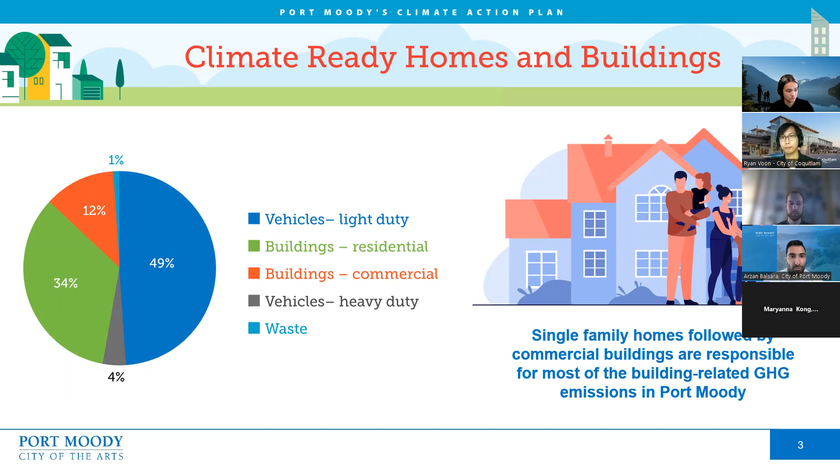So I'll just request that we go to the next slide, please. Port Moody has developed the Climate Ready Homes and Buildings Plan, which was adopted by Council last fall. The plan outlines specific actions that the city, residents, and business owners can take to make homes and buildings in Port Moody climate ready.

So what exactly is climate ready? A climate ready home or building is one that has been designed or modified to meet low carbon and high energy efficiency standards and manage many of the risks related to climate change, such as heat-related illness, poor indoor air quality, or damage from flooding or windstorms.

Go to the next slide, please.

You might have already researched heat pumps in the past and thought, these things are expensive. Well, we've got some good news. Port Moody is proud to say that we will be offering top-ups on the already existing rebates provided by the province and the federal government. We're offering $350 for a heat pump and $350 for a heat pump water heater, as well as $500 for any electrical service upgrades that might be necessary as a result of these retrofits.

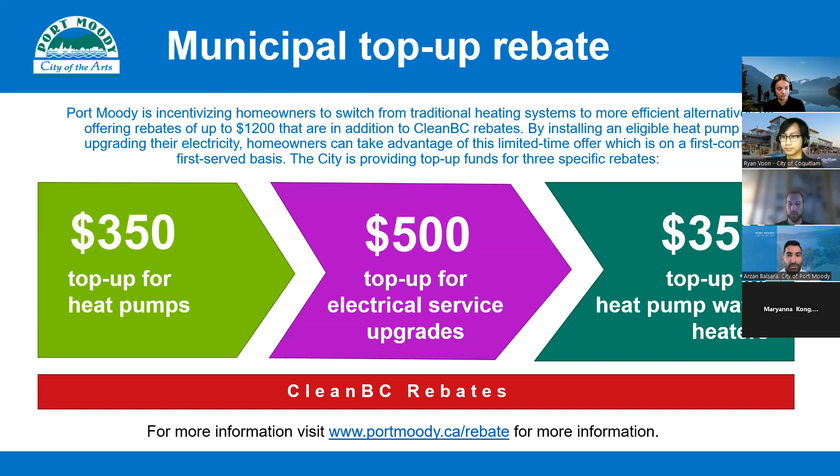These are all on a first come, first served basis. As Ryan can probably attest to, these rebates are pretty popular and tend to get picked up pretty quick. So if you would like more information on these rebates or any other rebates that Port Moody is offering, please visit portmoody.ca/rebate. And with that, I will pass it over to Ryan.

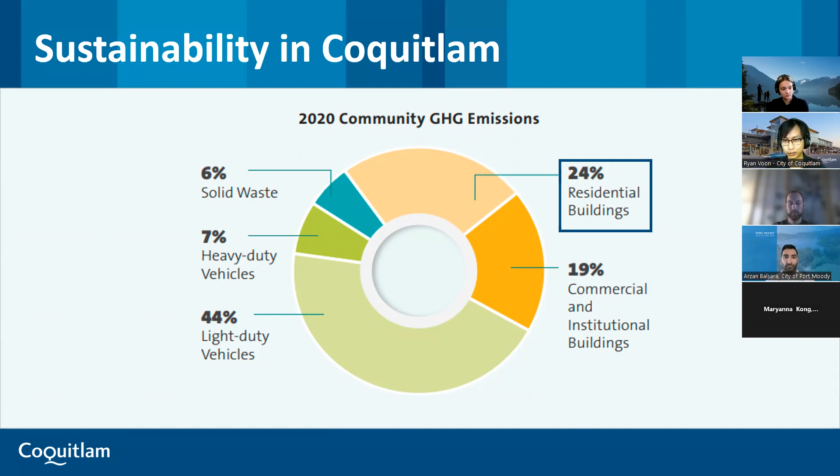Finally, also happy to announce, like Port Moody, residents in Coquitlam have the opportunity to access municipal top-up rebates from the city. If you are living within the municipal boundaries of Coquitlam, you are also eligible for a $350 heat pump top-up, $350 heat pump water heater top-up, and a $500 electric service upgrade top-up, which is in addition to the CleanBC rebates that you'll learn more about today. If you want further details on these rebates, visit coquitlam.ca/energyupgrades for more information.

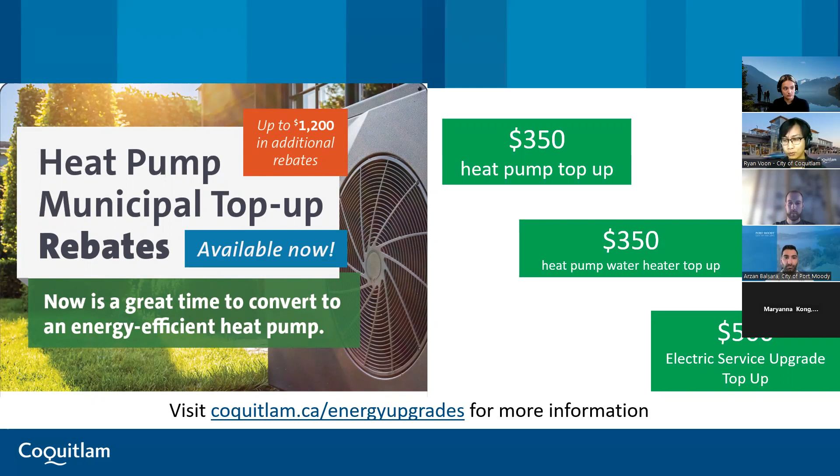Hey everybody, as mentioned, my name is Scott Walmsley and I'm the environmental coordinator for the city of Port Coquitlam. My role with the city includes the implementation of the environmental strategic plan, as well as the development of the city's urban forest management plan. I'm currently working on the development of the city's updated climate action plan, which is nearing its final stages. This new climate plan is intended to be a science-based plan focused on a low carbon resilience approach to climate action.

We're looking to integrate both emissions reduction initiatives as well as ways we can adapt to climate change. The plan is designed to assess and respond to climate-related hazards and impacts on 5 major sectors: critical infrastructure, natural systems, health, well-being and culture, housing, and economic development.

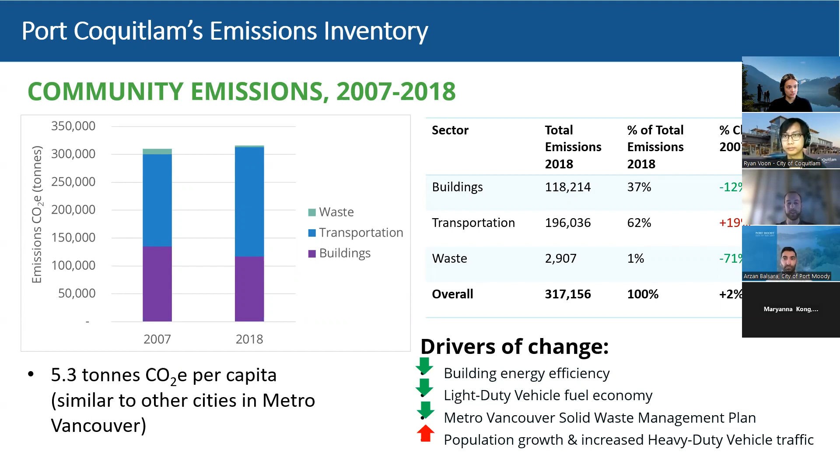In Port Coquitlam, our buildings take up roughly a third of our overall emissions. What's really interesting is the change from 2007 to 2018, showing we were somewhat successful in achieving an emissions reduction at the building scale since we last did this work in 2007. Improving building energy efficiency, predominantly through the BC step code, impacted this reduction. However, overall emissions increased a small amount during that time frame. That sends the message that even though we're able to achieve some modest reductions, there's still a ways to go to meet those science-based targets, which is why we're here today.

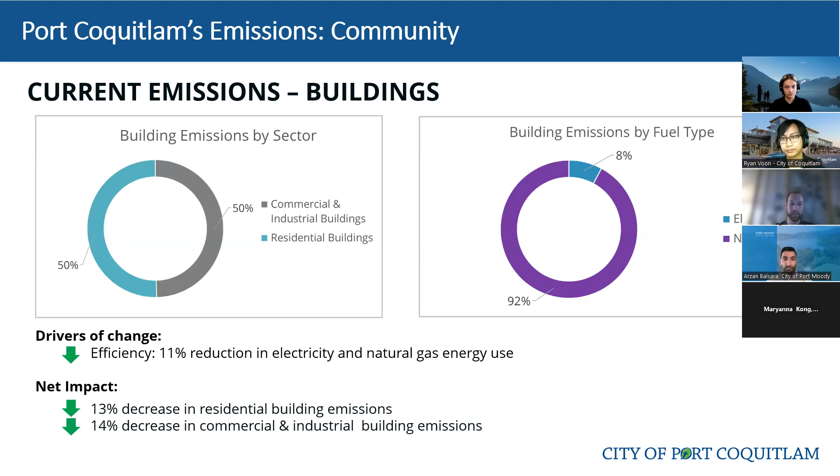Finally, what we're trying to achieve is to access part of the market that can focus on low carbon heating and cooling sources. You can see that 92% of buildings currently are heated by natural gas, and only 8% are heated by electric sources. Switching to electric heating in our residential buildings is a massive leverage point we could access to reduce emissions in our homes and buildings overall, and continue that trajectory of energy efficiency and emissions reductions.

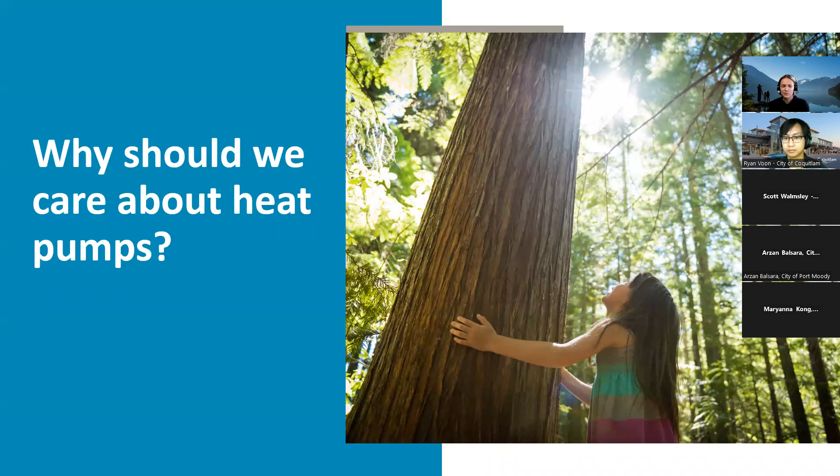So why do we care so much about heat pumps? Why are we seeing them everywhere, with so many ads on TV and radio? One of the biggest reasons is climate change, which we can see day to day, from the heat dome a few summers ago to the wildfire events throughout Canada in the last couple of months. As these extreme events become more common, it's more important to look at how our buildings and homes are contributing to climate change, as well as how we can adapt and become more resilient to its impacts going forward. Energy efficient upgrades are one of the best ways to achieve a more resilient and comfortable home as our climate changes.

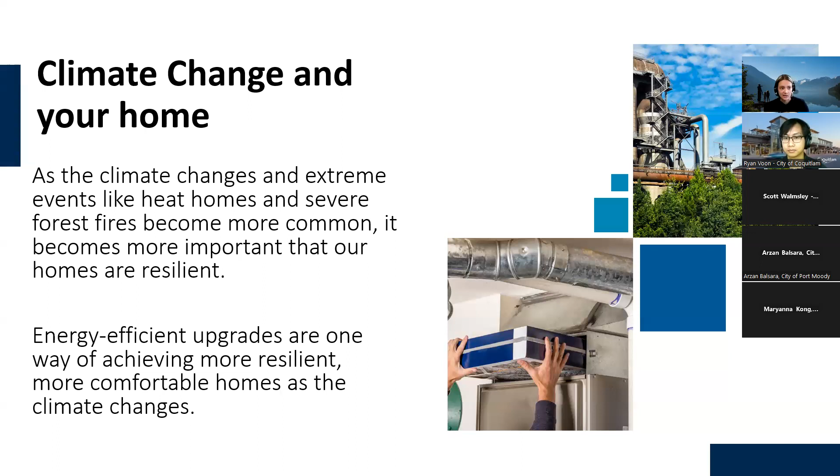Switching to heat pumps makes sense because here in BC, we're fortunate to have some of the cleanest electricity - about 98% of it is actually hydropower, which is considered carbon neutral. Heat pumps run off electricity, so that's also why they can be so climate friendly. Yet we're still experiencing roughly 70% of our economy being powered by fossil fuels. So how do we start thinking about shifting away from fossil fuels towards clean energy such as electricity?

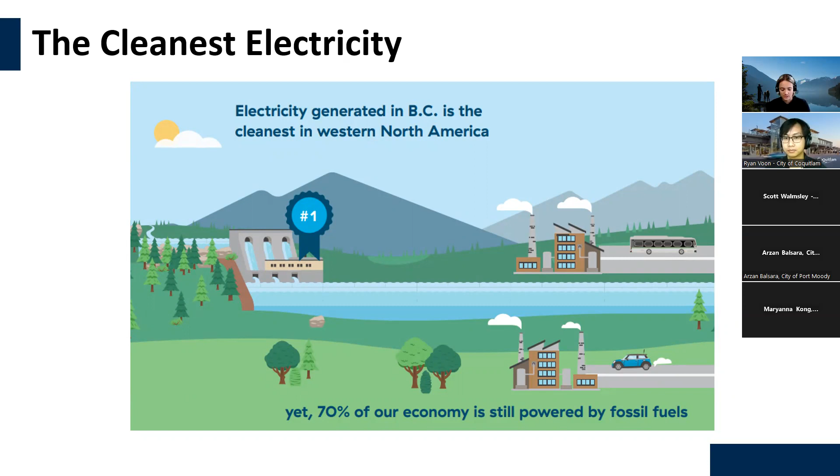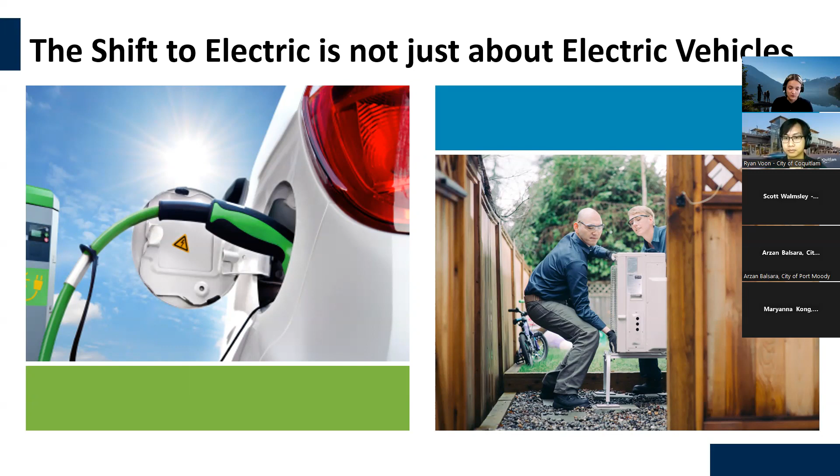A lot of us think about this too - electric vehicles have become so popular in recent years, and we seem to get very stressed or concerned about idling a gas-fueled vehicle for even a few minutes outside. Meanwhile, if you're using natural gas or propane to heat your home, you are essentially idling your home 24/7. So shifting to cleaner means of heat, like a heat pump, can have almost as great an impact as switching from fossil fuel cars to electric cars.

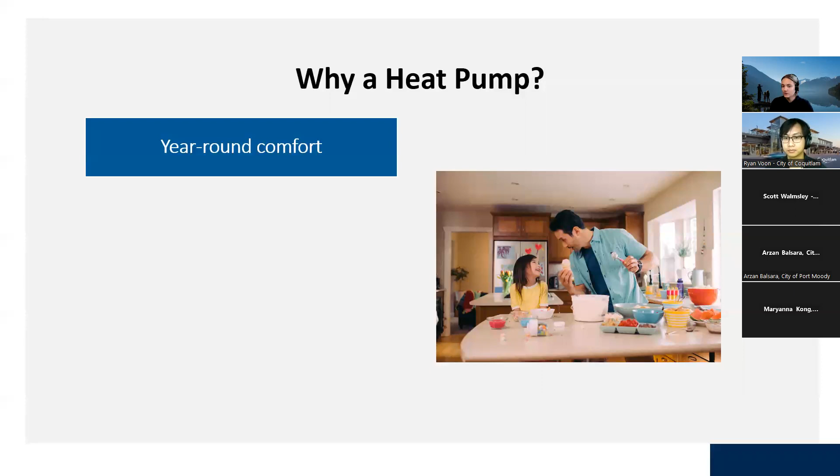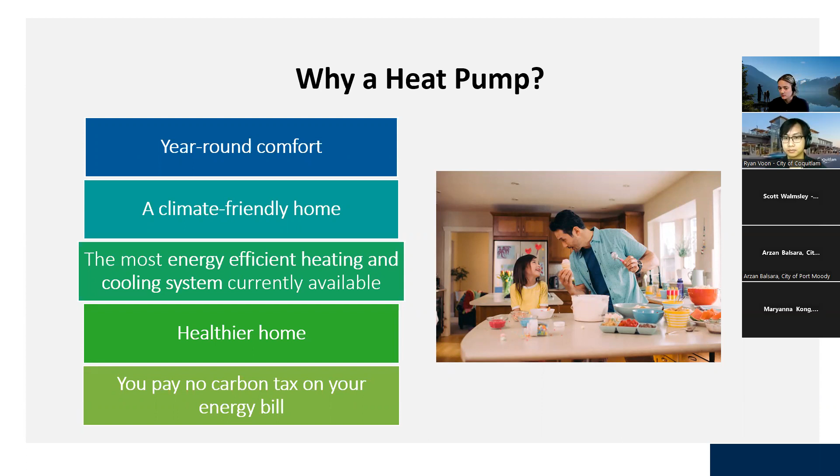There are a bunch of benefits when it comes to heat pumps, and that's why they are such a topic of conversation. Going through some of the benefits, we have year-round comfort. Heat pumps provide not only heating in the winter, but cooling in the summer as well, so they're two systems in one. You'll also get a climate-friendly home, shifting off of fossil fuels towards electricity. They're also the most energy efficient heating and cooling system available. You can also have a healthier home with the air filtration heat pumps offer. And if you're making that switch from fossil fuel heating, you'll no longer be paying a carbon tax on your energy bill. Now let's dive into these in a little bit more detail.

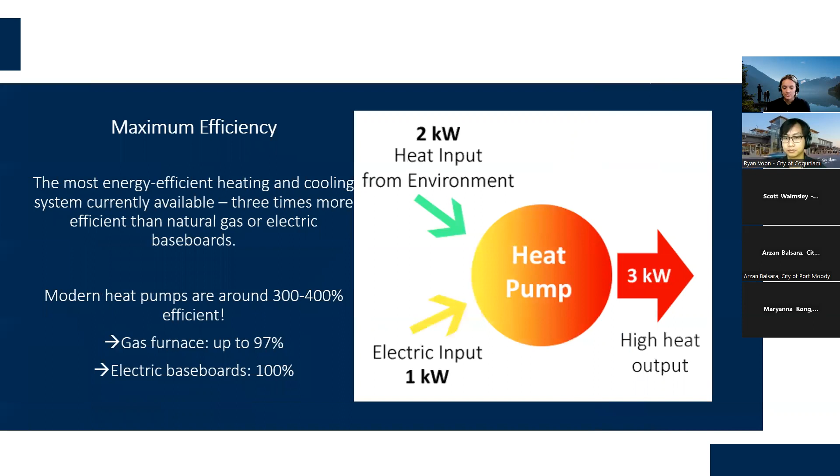Starting with maximum efficiency. Heat pumps are the most energy efficient heating system available, typically about 3 times more efficient than something like a natural gas furnace or electric baseboards. You might hear, wow, 300%, how is that even possible? For comparison, electric baseboards are about 100% efficient, and your gas furnace generally up to about 97% efficient. The key reason heat pumps are able to be so energy efficient, 300% or more, is because they're not creating or generating heat.

They're moving heat that already exists, pumping it up to a higher temperature and releasing it inside your home. If you look at the graphic here, we have heat that already exists in the outdoor ambient temperature, just hanging out outside, and we add a little bit of electrical input to run the components of the system that allow it to pump that heat up to a higher temperature and release it inside your home. That's how you're able to get those really high efficiencies when heating with a heat pump, because you're moving heat, not generating heat.

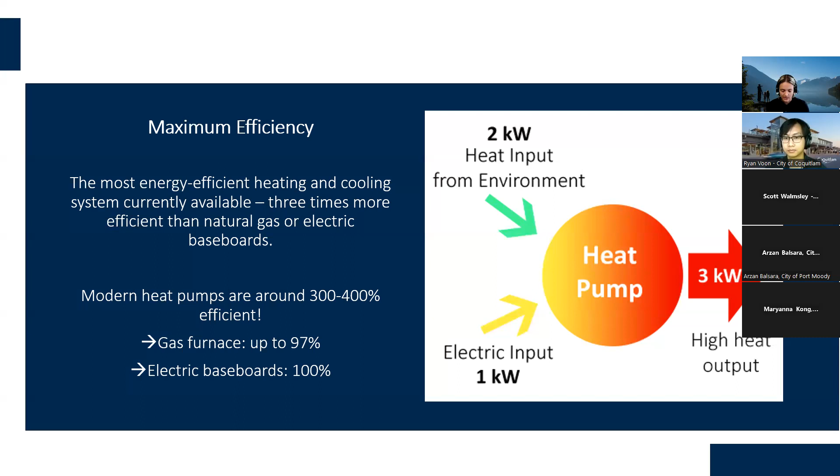We also have cost-effective. Heat pumps are the most cost-effective electric heating option. If you're making the switch from electric heat, baseboards, or a furnace, you might see reductions of up to 50% on your energy bills. Again, that 100% to 300% efficiency change is quite a jump, so you'll see that reflect on your bills rather quickly. If you're making the switch from gas, homeowners often experience similar or lower bills when making that switch.

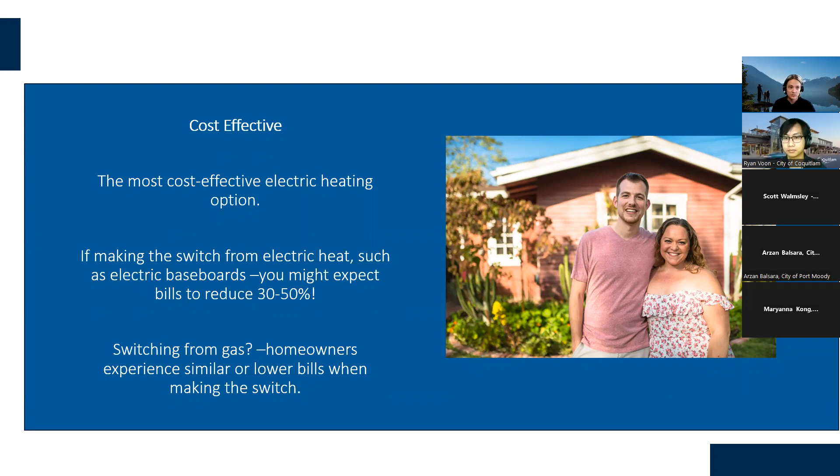You also have a climate-friendly home, as they are the most climate-friendly heating and cooling system here in BC. As I mentioned, BC electricity is about 98% hydropower, and hydropower is renewable. Taking a look at the image here, it's no surprise that oil heating has some fairly substantial greenhouse gas emissions associated to it. But even looking at something like natural gas, there's still a large chunk of GHGs associated with burning that as a fuel source in your home. If you choose an electric heat pump, that's going to dramatically decrease your household emissions.

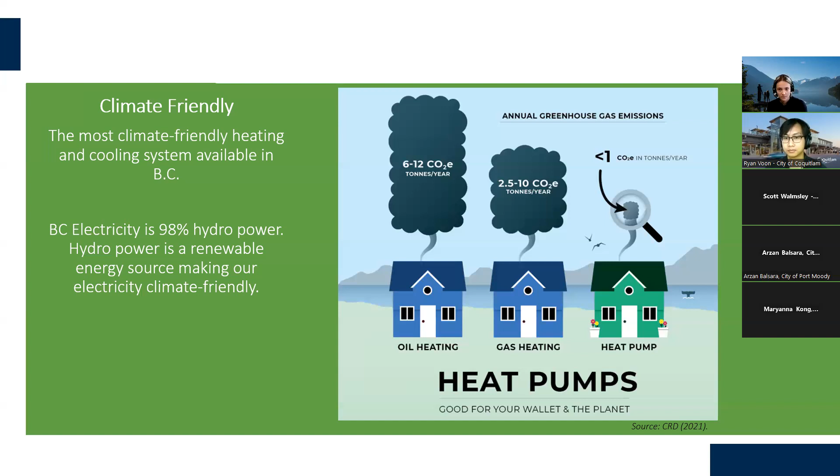You can also have the opportunity for better indoor air quality. Heat pumps do actually provide some air filtration as well as humidity control that can help rid your home of indoor pollutants, dust, pollen, and other allergens. Between some of the different types of systems I'll share in a couple of slides, we have options for some more basic filtration as well as higher end, high quality add-ons for filtration, depending on what you might be looking for.

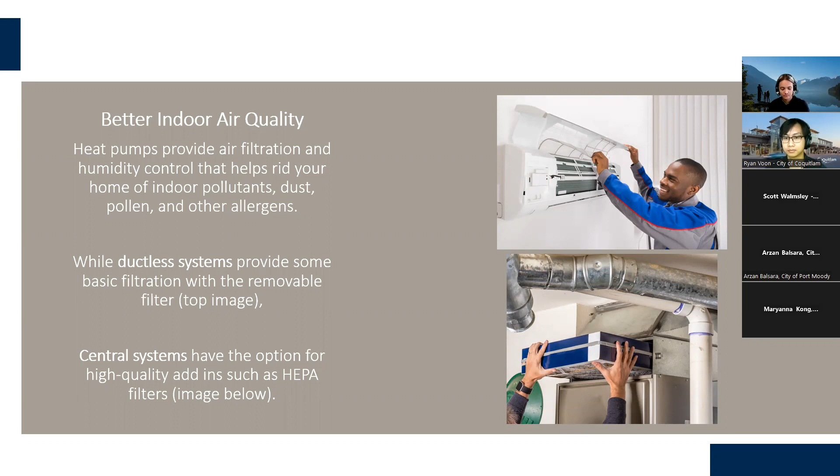And again, we have cooling and dehumidification, two systems in one. When you install a heat pump, you get that added benefit of cooling in your home, so you can be better prepared for other extreme events, such as a heat dome, making sure that you and your loved ones, including your pets, can all stay comfortable inside the home. They also have that dehumidification option as well, if you're looking to reduce some indoor moisture in the home.

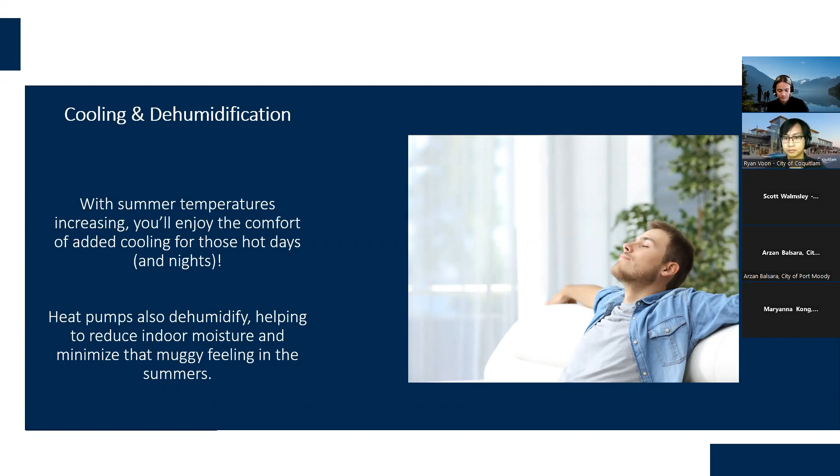Heat pumps also practice a really great set it and forget it approach. Unlike a gas furnace, where you might adjust the temperature settings multiple times throughout the day, a heat pump is best left alone, setting it to your desired temperature and letting it do its thing. It will operate most efficiently when you practice set it and forget it, and it makes it really easy when you don't have to worry about adjusting the temperature throughout the day.

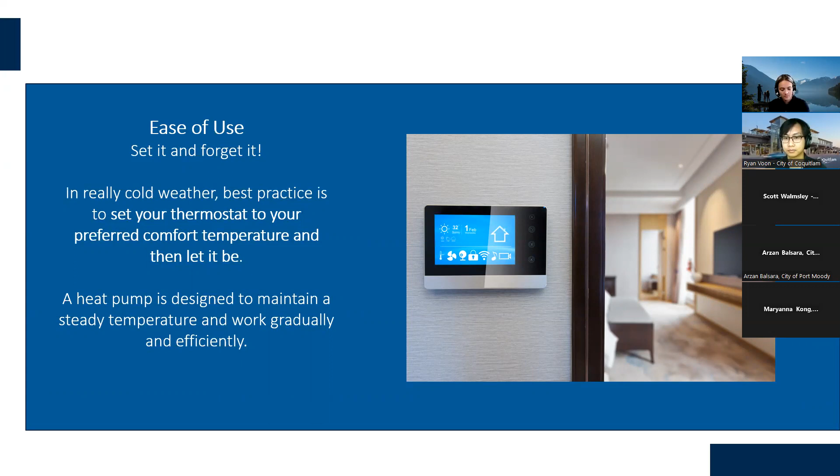There's also the option for zonal heating, especially if you're looking at something called a ductless mini split heat pump. You can really customize the system to suit your home. Zonal heating allows you to have different temperatures. If you perhaps have an in-law suite and they like it a bit warmer or cooler than you might, you do have that flexibility for different temperature zones with a heat pump.

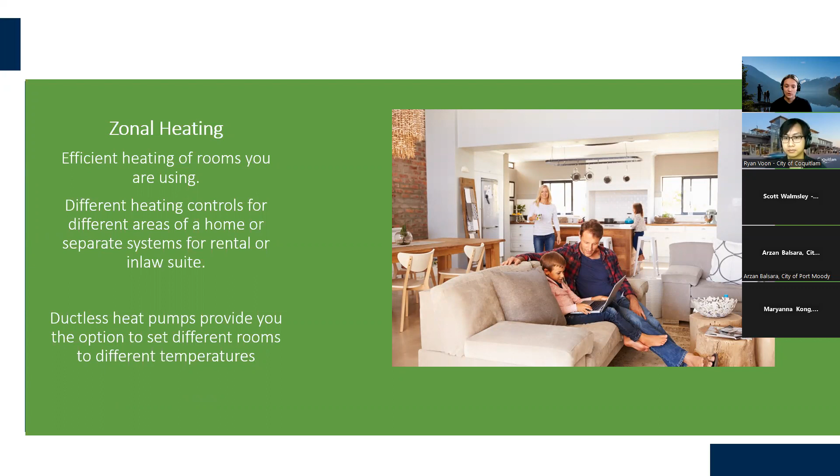Now, to really wrap up all of these great benefits, heat pumps are the heating system for the future. Just like electric vehicles, we've seen this shift. More and more cars are shifting to be exclusively electric off of fossil fuel. We're seeing that same shift in home heating, moving off of fossil fuel towards electric heat pumps. They really are quite simply the Tesla of heating systems, if you will, making your home ready for the future.

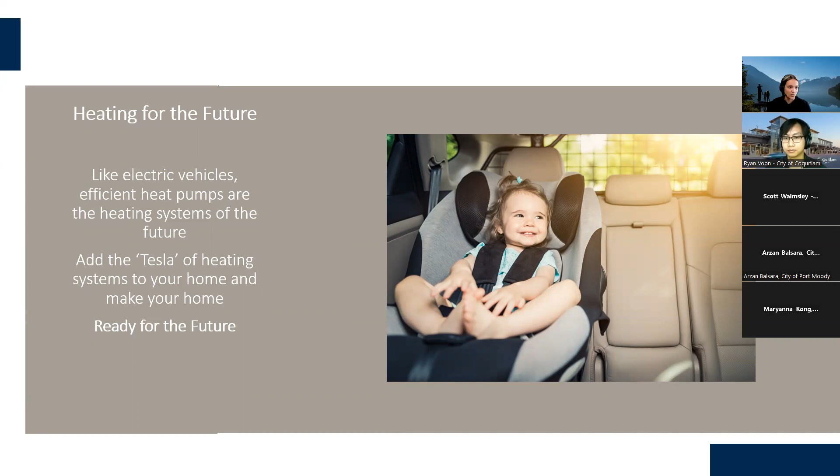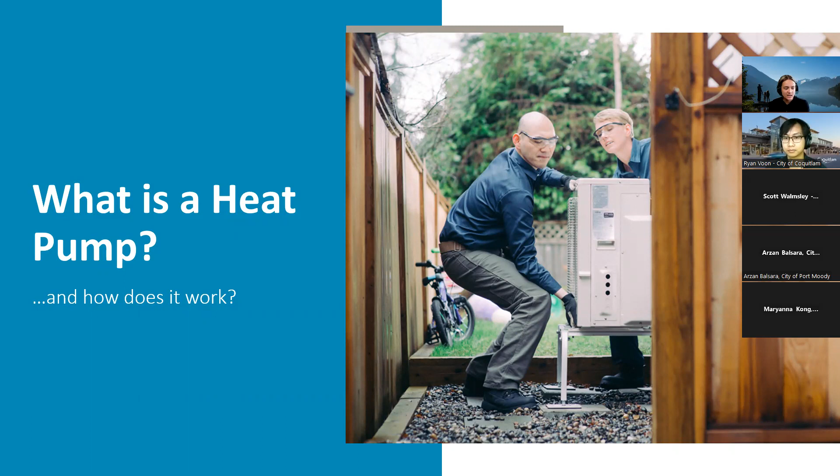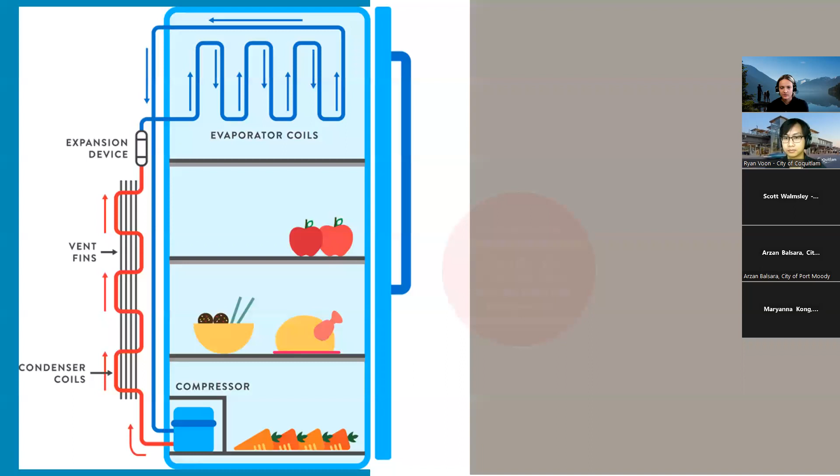Now, I've spoken on this a little bit, but to dive into heat pumps in more detail and how they work, you may be surprised that you already have a type of heat pump in your home, because your refrigerator is essentially a heat pump. Refrigerators work where the coils in the back of the fridge help remove the warm air inside and release it out the back. That cycle continues, ensuring the drinks and food inside your fridge stay nice and cold. A heat pump is really no different. We often avoid looking behind or underneath our fridge, depending on how old it is, but if you take a look, you'll see those coils, and they're often pushing out heat if you put your hand close to it. So that's the heat pump in your refrigerator working to remove the heat from inside.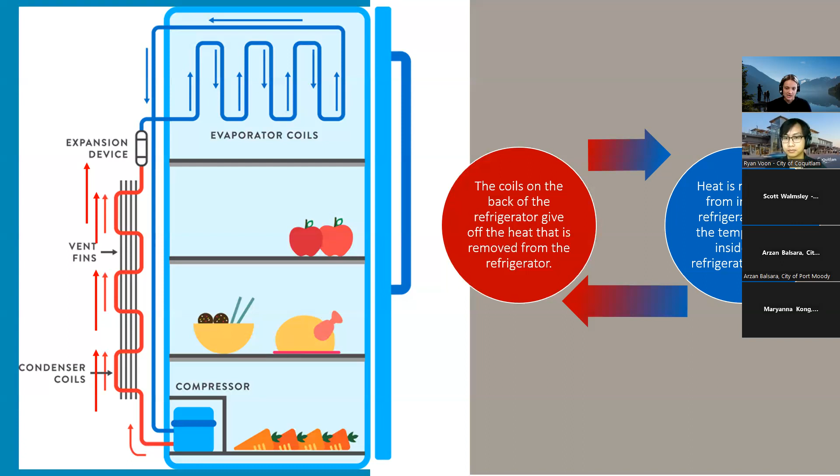Now, to hear a little bit more about how heat pumps work, I'm going to pass things over to Dave at BC Hydro.

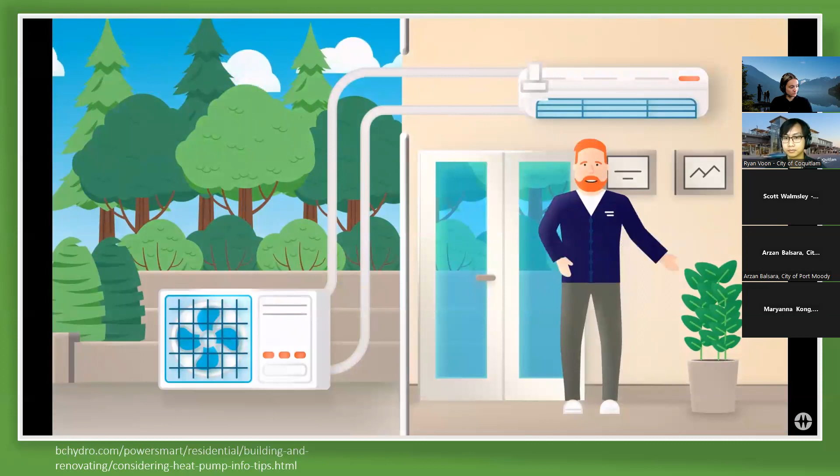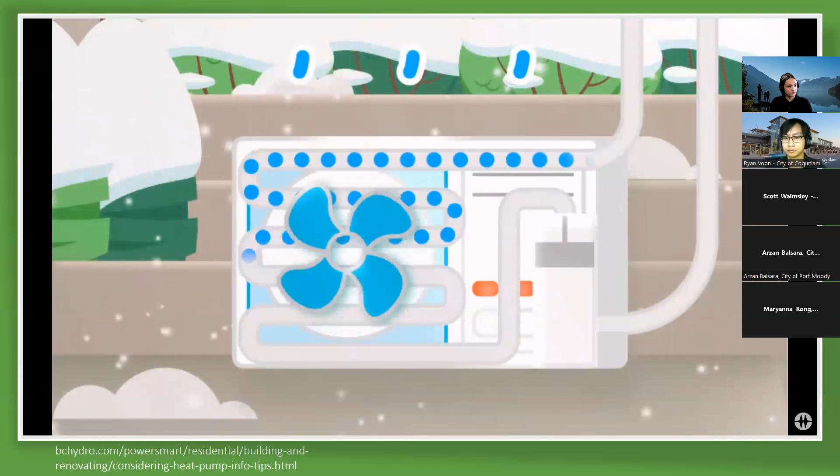Hey, it's me, Dave, and this is a heat pump. It's an energy-efficient heating and cooling system you can install at home. How does it work? Here, let me show you. Your typical air source heat pump, like this mini split system, has two main components, an indoor and an outdoor unit, connected by a refrigerant line. To heat your home in the winter, the outdoor unit pulls heat from the air outside your home. Yes, believe it or not, even when it's cold, outside air still contains a certain amount of heat. The warm air then goes through a refrigerant coolant that is compressed to increase the temperature even more. This warm air is then pushed through to the home.

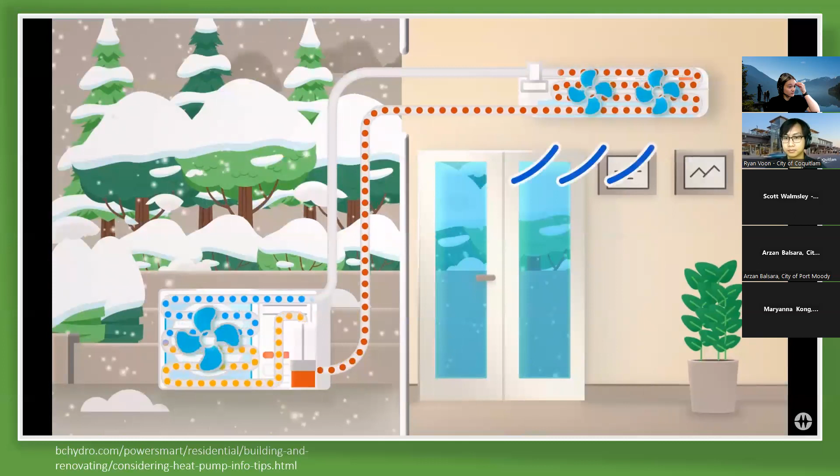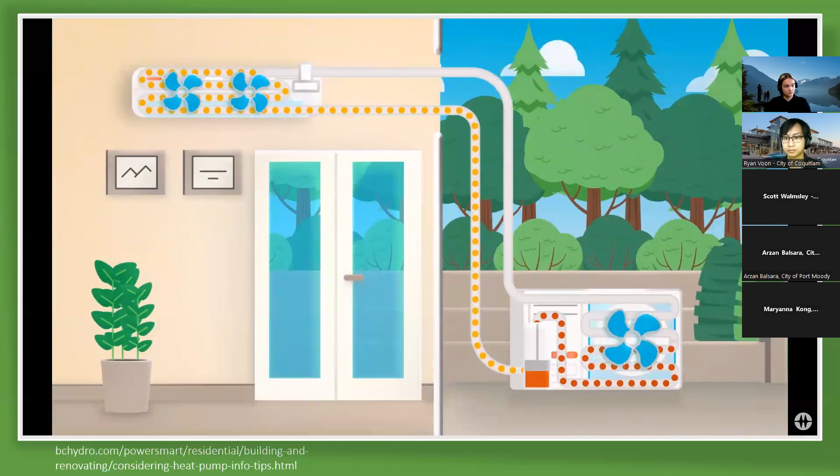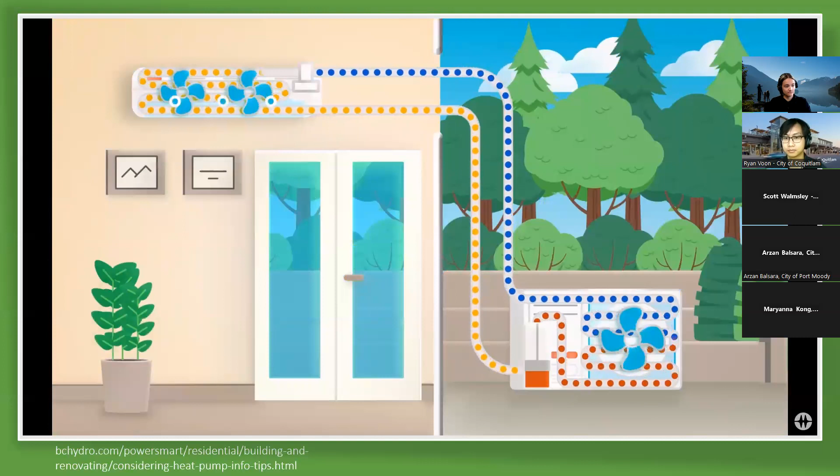In the summer, to cool your home, the process is reversed. The heat pump absorbs the warm air in your home and transfers it outside. The compressor circulates refrigerant to the indoor evaporator coil, and the refrigerant absorbs heat as it passes over the indoor air. The resulting cool and dehumidified air then gets blown back into the home. And that's how a heat pump works.

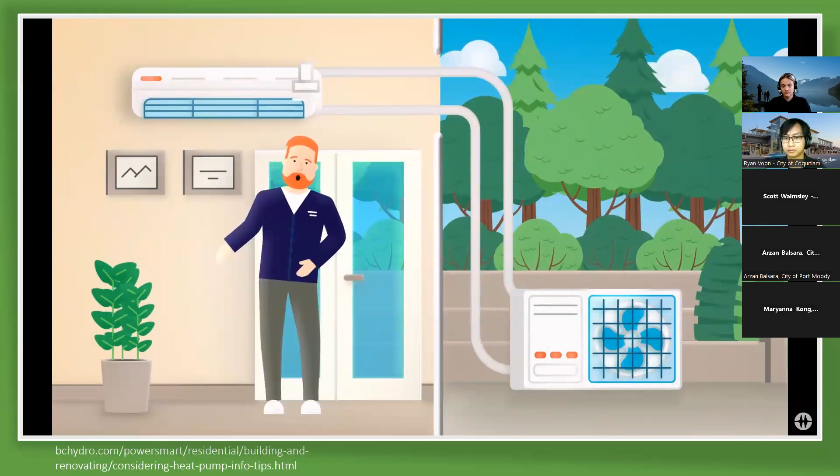The key here is that heat pumps don't generate heat, but instead move it from one place to another, which is why heat pumps are so energy efficient. In fact, a heat pump can be up to 300% more efficient than electric baseboards. So if you already have electric heat, a heat pump can help you save on your energy bill. Less energy and more savings? I like it. If you're switching from a fossil fuel-based heating source like a natural gas furnace, you'll be reducing your carbon footprint. It's kind of like going from a size 18 down to a size 2. You get the idea. It's an environmentally friendly option, especially here in BC where we're powered by water. Plus, with rebates from CleanBC and BC Hydro, there's more to save.

Thank you, Dave. Alright, well, we've already seen one type of heat pump from that video, but starting with another type, we have the central ducted system. These systems utilize ductwork connected to vents in your home to provide whole home heating and cooling. They're often a great option to replace a gas or propane furnace when you have that existing ductwork in your home.

They will often be connected to a slightly larger outdoor unit, connected with refrigerant lines to an indoor air handler. That would be the sort of box, if you will, that replaces the furnace, often found in your mechanical room, and it would distribute that warm and cool air throughout your home all season long. They're connected through a wall thermostat, just like a furnace, to be able to make those temperature adjustments.

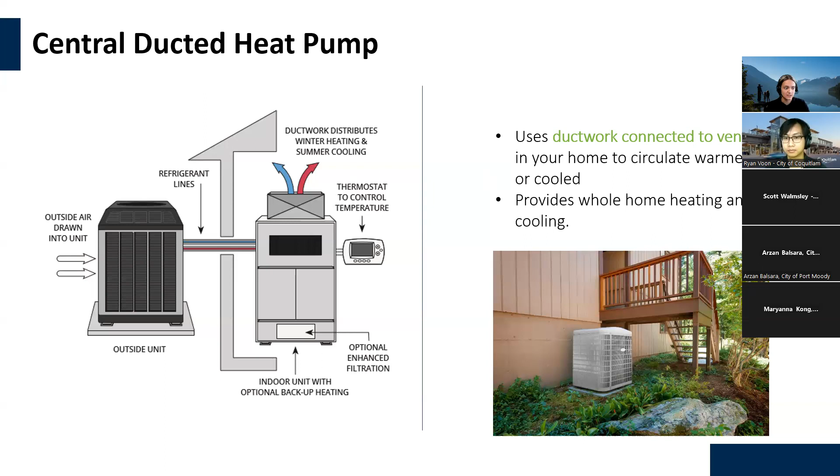Now, the other type of system that we see quite often is a ductless mini split heat pump. These systems provide zonal heating and cooling through the use of indoor heads or units. You don't require any ductwork at all for this type of system. They're generally about 3/4 of the way up on a wall, providing that zonal heating. They can be a great option if you have electric baseboards or an old boiler and don't have ducts for a central system.

That doesn't mean you don't get to install a heat pump. These are a great option. They can be connected to one or multiple indoor heads. Based on the graphic on screen, we have a smaller outdoor unit connected to refrigerant lines that go to the indoor head. If you have a few different heads, there might be a different line to each indoor unit, and each unit would be controlled through a remote.

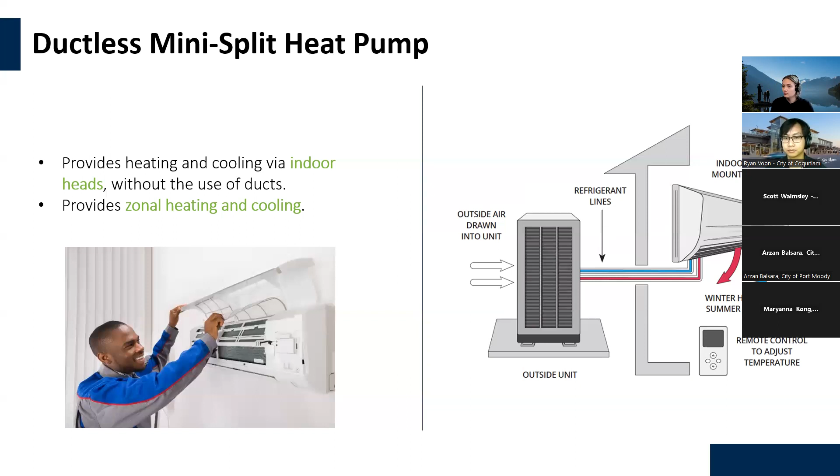Now, to compare the two quickly: both the central and ductless options will provide air conditioning, where the ductless option is the one that will truly give you that zonal heating option. Central systems are the only ones that require ductwork, and they will both provide air filtration and dehumidification.

So for ideal installation scenarios for a central system, realistically we have existing ductwork in the home. We're looking for central heating and perhaps more effective air filtration, with options for high quality add-ons with a central option.

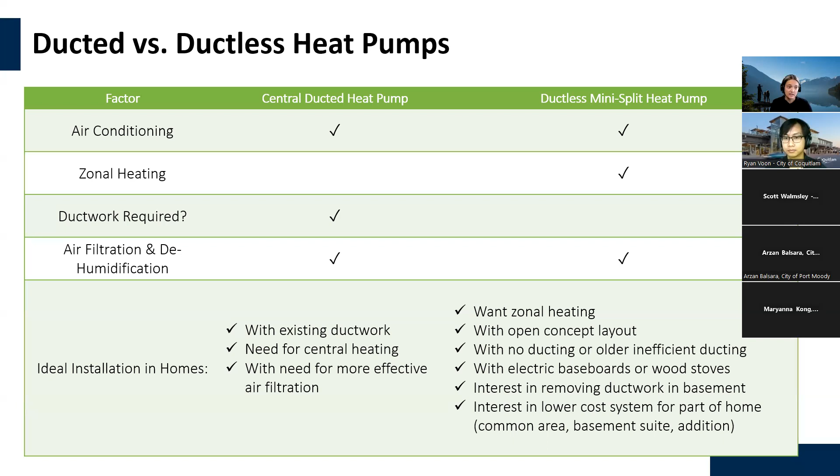In the case for ductless, we are looking for zonal heating, perhaps an open concept layout or a home with no ducting, replacing electric baseboards or even a wood stove. Maybe you're interested in removing ductwork, making your basement suite a more livable space, adding some ceiling height. That can be a great way to get rid of that ductwork and install a more high efficiency heating and cooling system in your home.

On to some of the different heat pump myths that we often hear about. The first one is that heat pumps are expensive to purchase. Before I dive into this table in more detail, I want to share some context.

This is pulled from a fuel switching case study from 2022, and it really does emphasize that there is a significant range in installation costs when it comes to both a high efficiency gas furnace and a central ducted heat pump. We have the average range you'll see, keeping in mind that cost is always going to range based on a number of factors, from brand to contractor to your home size and layout. Just something to keep in mind.

Looking at the screen, generally speaking the average cost of a high efficiency furnace is somewhere around $7,000. For a central ducted heat pump, you're looking at something around $18,000. Now you might be thinking, okay, that's a fairly large difference in cost. But now we look at available incentives: FortisBC does have a rebate of up to $1,000 if you're installing a new gas furnace. If you're installing a heat pump, there are rebates and other incentives of up to $11,000, bringing the cost after rebates to be quite comparable between the two.

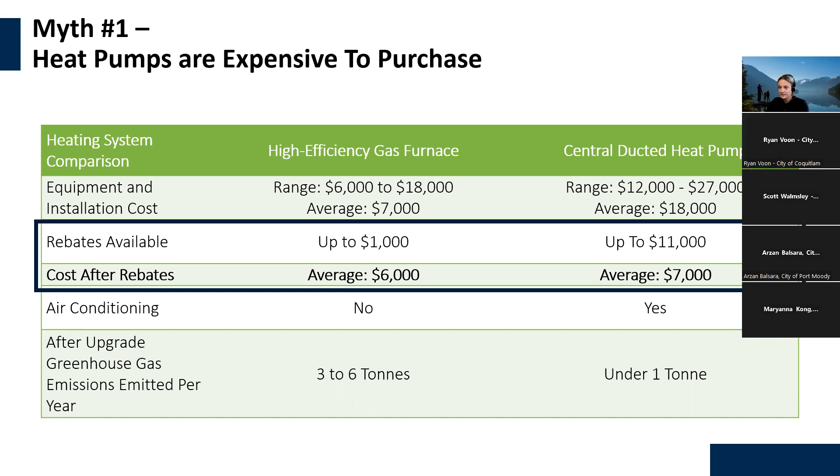Oh. Find my slide here. Everyone can hear me okay still? That was just a little tech hiccup. All good? Thanks, Ryan. Sorry about that.

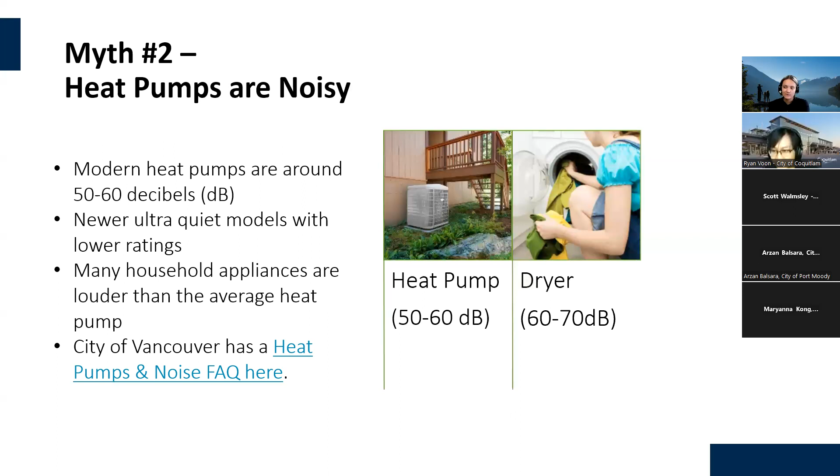Alright, so as I was saying, a myth we hear is that heat pumps are noisy. While older systems definitely could make some noise, the technology has come a long way. Modern heat pumps are typically around 50 to 60 decibels, with new ultra quiet models being even quieter. You'd be surprised that many average household appliances are louder than a typical heat pump. Here we have a dryer that's actually a fair amount louder at 60 to 70 decibels, and even the sound of a toilet flushing is quite a bit louder than that.

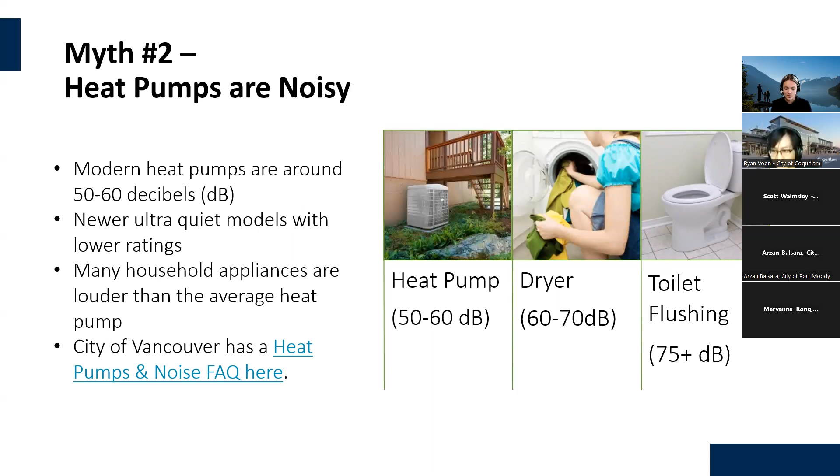Keeping in mind, when we talk about the noise associated with a heat pump, most of that concern comes from the outdoor unit. So really, noise should not be a concern, as they are much quieter than in years past. For more information on noise, as well as key considerations for siting or placing that outdoor unit, the City of Vancouver has a really great FAQ, linked in the slide you'll receive a copy of following this webinar. It goes over some great tips and tricks on using landscaping and other things to help deter some of that noise that may come from the outdoor unit.

Moving on to myth number 3: that heat pumps need a lot of maintenance. Well, really, just like any other heating system, they do require typical regular maintenance. So similar to a furnace, best practice is to schedule a servicing appointment every 1 to 2 years to make sure the system is running smoothly. You can also do some general maintenance yourself, such as cleaning the filters and making sure the outdoor unit is clear of any debris. This will help ensure the system can work better for you in the long run as well.

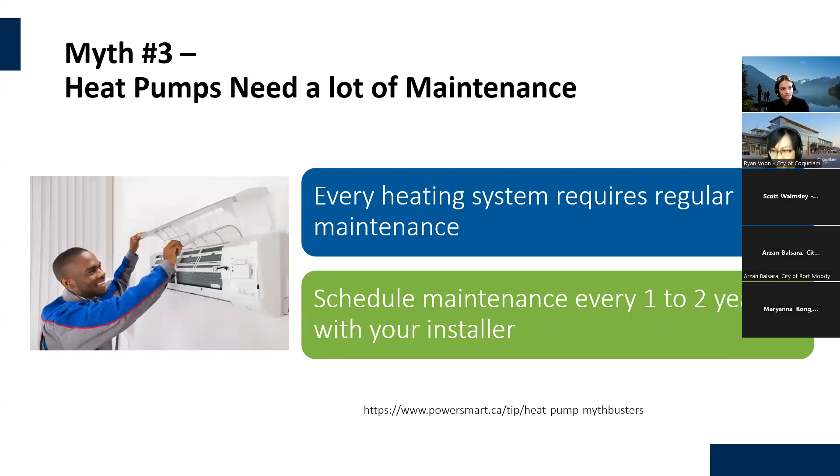Myth number 4 is that heat pumps are expensive to operate. Now, this one does come with a fair amount of text on the screen here. To really break that down, homes with heat pumps can have comparable to lower operating costs to that of a natural gas home. And there are some key considerations around that.

The first one is you will, of course, see changes to your hydro bill. If you're replacing electric heat to go to a heat pump, you will see a decrease in your electricity bills—you're going to a more efficient heating system. Now, if you are replacing something like a gas furnace with a heat pump, you will likely see an increase in your hydro bills. You're switching from gas as your primary heating to electricity as your primary heating, so you're likely to use more electricity, but this will be offset by a decrease in your fossil fuel consumption.

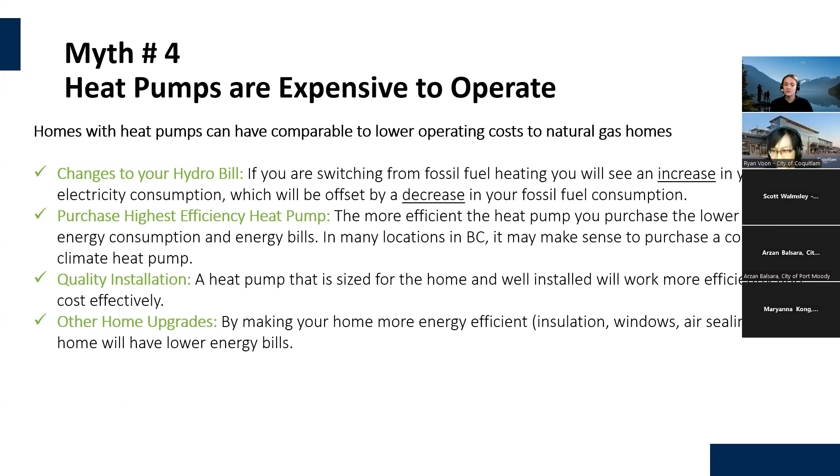Best ways to ensure that the heat pump will work efficiently and be friendly on your energy bills is to purchase a high efficiency system, as well as ensure that system is installed properly with a quality contractor. You can also do other home upgrades to make that system run more efficiently—things like added insulation, high quality windows and doors, air sealing, and draft proofing. This will all help ensure your home has lower energy bills.

One of the last myths here is that heat pumps don't work in cold weather. Now, again, the technology has come a long way, and we have these systems called cold climate heat pumps that are pretty incredible. They can operate in temperatures as low as -25 degrees Celsius. We have even seen these systems working in colder conditions than that, and they will have what's called a higher HSPF, or heating seasonal performance factor—that's the efficiency in the heating season in the wintertime. So they'll have higher efficiencies in the winter, able to maintain high efficiencies as the temperature drops.

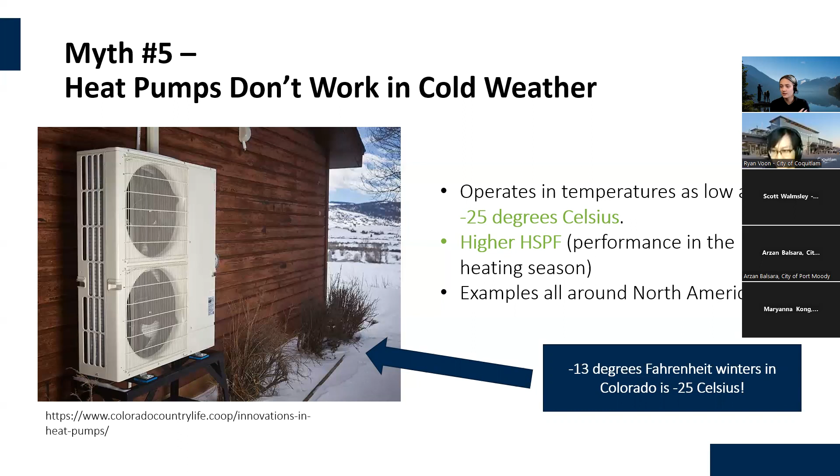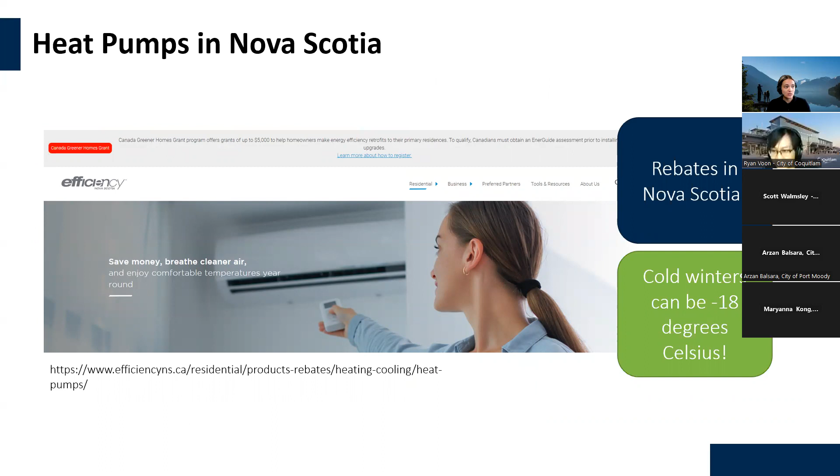And we see examples of these systems all throughout North America, where we do experience colder temperatures than anything we would perhaps experience in the Lower Mainland or on Vancouver Island. This photo here is taken from Colorado, and they do experience some pretty chilly winters. This particular photo was taken to highlight that these systems do, of course, work in -25 degrees. And there is also a rebate program in Nova Scotia, so they are promoting heat pumps quite heavily there as well. They do have some pretty cold winters, ranging at about -18 degrees. So heat pumps absolutely can work in the winter season.

A couple of things to keep in mind before you go ahead and purchase a heat pump. You do want to ensure you're working with a qualified installer. This means avoiding any type of do-it-yourself installations or buying wholesale or online. Contractors will receive some pretty specific training with one or a couple of brands, so they really do know and are familiar with these brands. So choose a qualified installer.

Be sure to obtain multiple quotes, as I just mentioned. The contractors will have training on one or a few brands, and there are a handful of excellent brands and contractors out there. So you want to make sure you're getting a good variety of quotes before you make your decision.

It's always best to practice the house-as-a-system approach. This speaks to how your home works as a system—you change one component of the home, and it will likely impact the other. The best example of this is ensuring that you handle air leakage and address insulation issues before purchasing a new heating system. This will make sure it works better. Oftentimes you can size a more effective system, perhaps even size a smaller system, if you address a lot of the air leakage in the home.

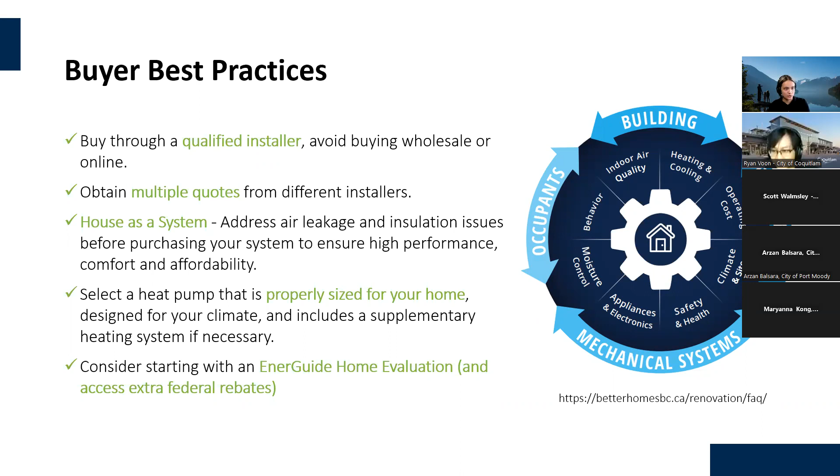And to really understand all of these different things, it is recommended to start with an EnerGuide home evaluation. There is some extensive home modeling done to see how your home uses energy, as well as where improvements can be made. Energy evaluations are, of course, step number one in accessing the federal incentive program as well, and I'll get to those rebates and other incentives in just a few slides.

Betterhomesbc.ca/find-a-contractor, and you would be required to work with one found on this list. So now what rebates are available if we are looking at installing a heat pump? To learn more about all the different offers, your best place to gather this information would be the provincial website, betterhomesbc.ca. This resource is really your one-stop shop where you can learn about specific products, heat pumps, and also the various rebates and how they apply to your specific scenario.

And if at any point you're ever confused or overwhelmed, there is the CleanBC Energy Coach service. This is a free service available to homeowners throughout BC, and they can provide direct support to help navigate the various rebates that are available. If you need help checking products before you go ahead with an install, or any questions you might have, this is a great resource to use.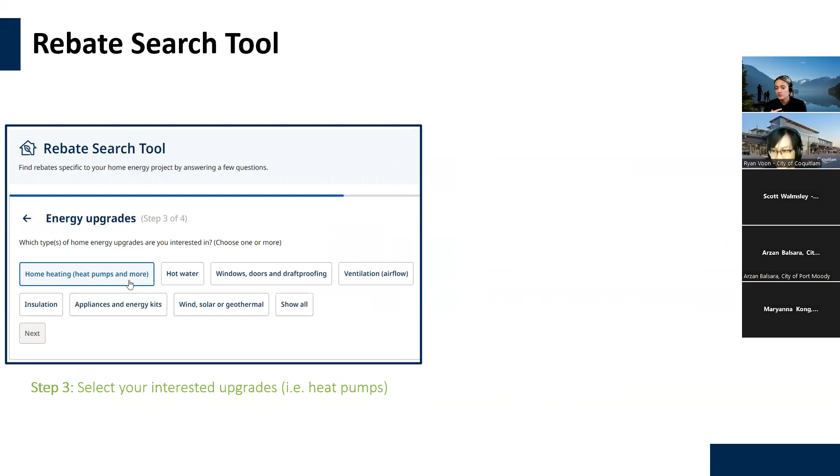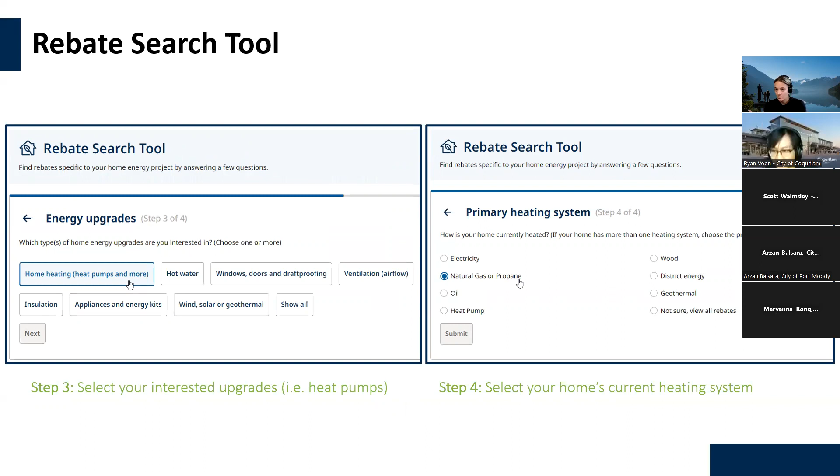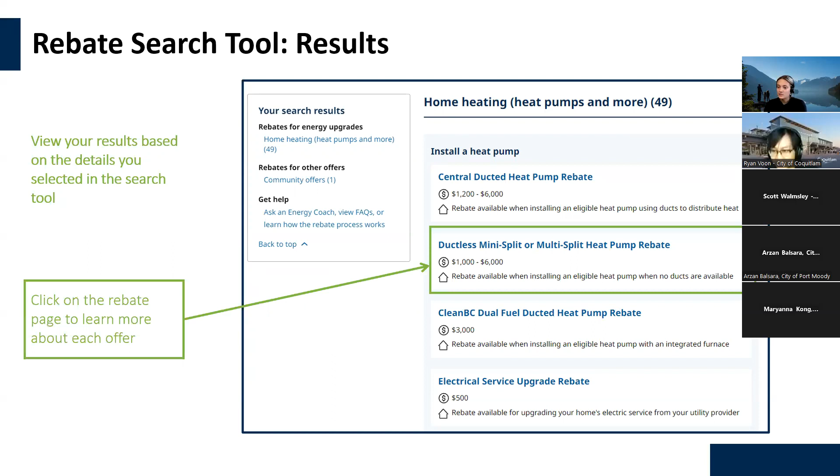To first navigate what may be available for your specific home, I recommend using the rebate search tool on the provincial website. It has a few different steps to really narrow down what might be available. You start with your project type, whether it's a renovation or building a new home, followed by your specific location. Then you can go through and click what upgrades you're most interested in, or just show all if you're not too sure. Finally, you'll select your home's current primary heating system, whether that's electric baseboards or gas furnace, and you'll get a list of results of what might be available to you. You can click on those individual pages to learn more about the specific rebates.

To highlight the specific offers, the provincial CleanBC program has a few subsets of different programs. There's the Better Homes program, or the main rebate program, which offers renovation rebates for homeowners across BC. They have rebates of up to $6,000 when installing a heat pump, plus those municipal top-ups where available.

There is also an income qualified stream of the program. This offers enhanced rebates for income qualified households, and those rebate amounts for a heat pump are up to $9,500.

One of the additional programs is a low interest financing program—actually a zero interest program. So there's a zero interest $40,000 loan when you are replacing fossil fuel heating with a heat pump. This is an alternative to the regular provincial rebates, so it's the loan or the rebates.

And there is also this fun bonus offer called the group purchase rebate. This is up to $500 per home when replacing fossil fuel heating with a heat pump. You can join an existing group or start your own group and promote it. The more people who join the group code and register using the code in their application, the more you'll get in a rebate—so the larger the group, the larger the rebate.

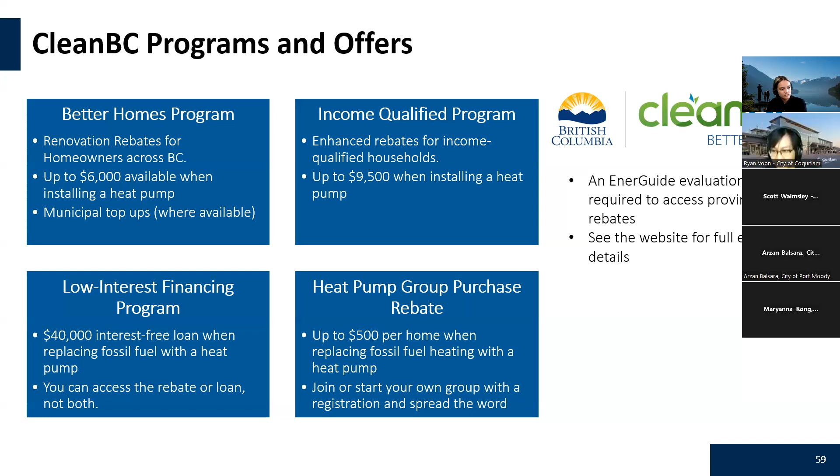Now, speaking more to heat pumps in particular, if you do have an electrically heated home—electric furnace or electric baseboards—there are rebates through the province of up to $2,000: $1,000 for a ductless mini split system, or $2,000 if you're installing a central ducted system. And the federal program offers up to $5,000. This will depend a little on the specific system you choose to install, but pulling those together, you can access anywhere from $6,000 to $7,000 when stacking the two programs together.

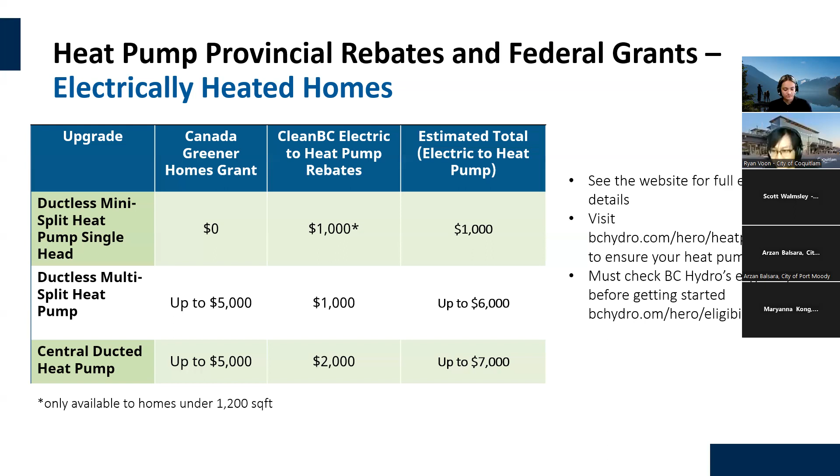Now, for those fossil fuel heated homes, we do have some larger incentives. The provincial program offers up to $6,000 if you are replacing fossil fuel heat with a heat pump, and the federal grants are up to $5,000. So if you stack that all up together, you can get upwards of $11,000 across both programs when replacing fossil fuel heating with a heat pump.

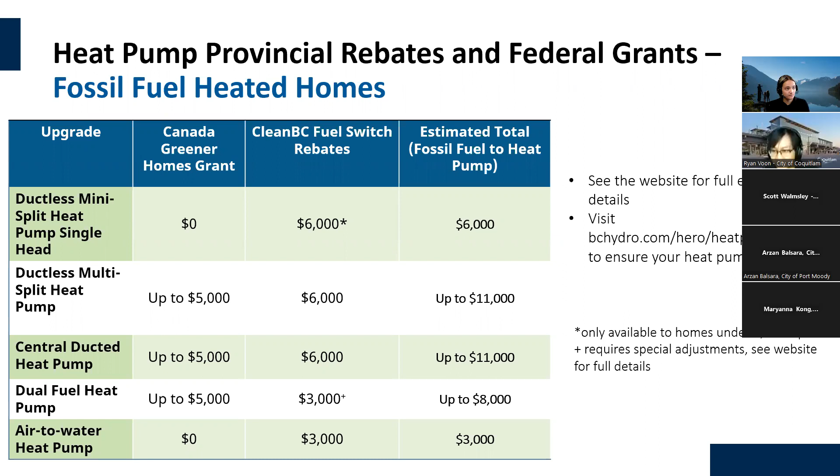To speak to the federal program in a little bit more detail, there are three branches of that program: the grant, the loan, and a somewhat newer offer, the oil to heat pump affordability program.

The grant is up to $5,000 towards upgrades and up to $600 towards an EnerGuide home evaluation. Homeowners are required to register online, and you do have to complete a pre and post retrofit EnerGuide home evaluation to access this offer. So before you're doing any upgrades in the home, step one is to register and get that pre-retrofit evaluation done.

To access the federal program, the home needs to be your primary residence as the legal homeowner, and would not be applicable to renters or rental homes. Again, the grant can stack up to 100% of the total cost, along with the provincial rebates.

The federal program also offers a zero interest loan of up to $40,000. This is in addition to the $5,000 grant, and can be used towards a slew of different upgrades they offer incentives for, whether it's a heat pump, windows and doors, insulation, or even solar. Again, the evaluation is still a requirement, with a repayment period of the loan over 10 years.